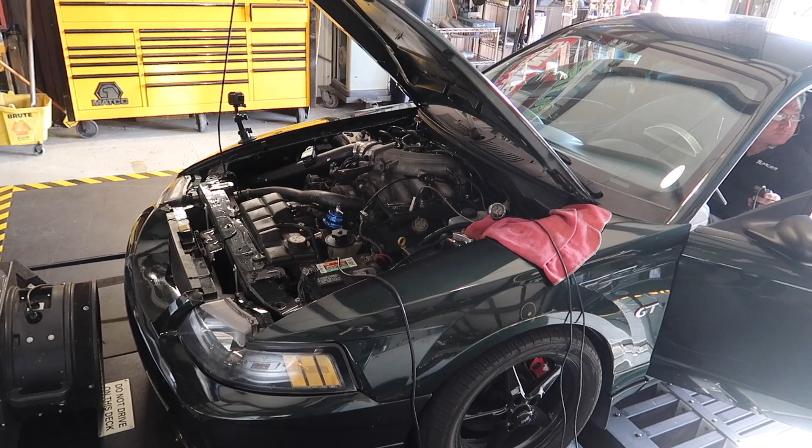Alright guys, so it is now the next day. This is saving the Bullitt. We left it out here, and we gotta figure out how bad it is. Zach brought me over here.

Our intention here, I took 2 bolts off the Terminator since we're gonna be taking those brake bolts off for the axles anyways, so hopefully we can bolt this brake on. I don't know the condition of it, so we're gonna pull the wheel off, get the car jacked up, and see where we're at, because the caliper coming off was definitely really bad, and it's definitely an eye-opener because I was just racing this car at the track.

So definitely gonna bolt check this car all the way through. For the most part, I have checked everything in the front suspension. We're definitely gonna check what's going on here in the rear. The old DeWalt should be able to break these bad boys loose.

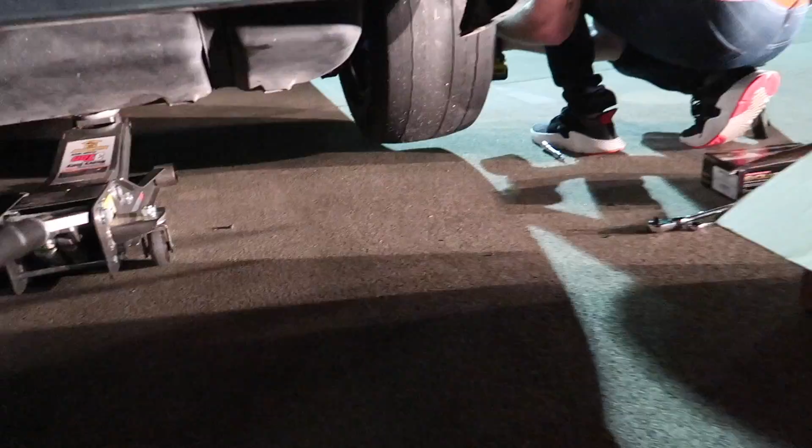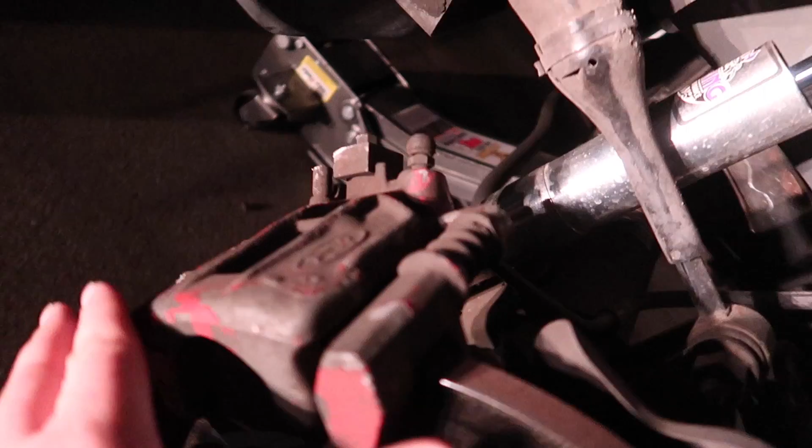So, what the hell happened here, man? Oh, shit.

It's not these bolts. That's the bolts that I brought. It's that.

Missing one back here. So we're missing the bolts on the back. So it turns out that the caliper bracket bolts are the ones missing. So we're gonna go yank the one off the Cobra and order a new one for the Cobra. Then we should be good.

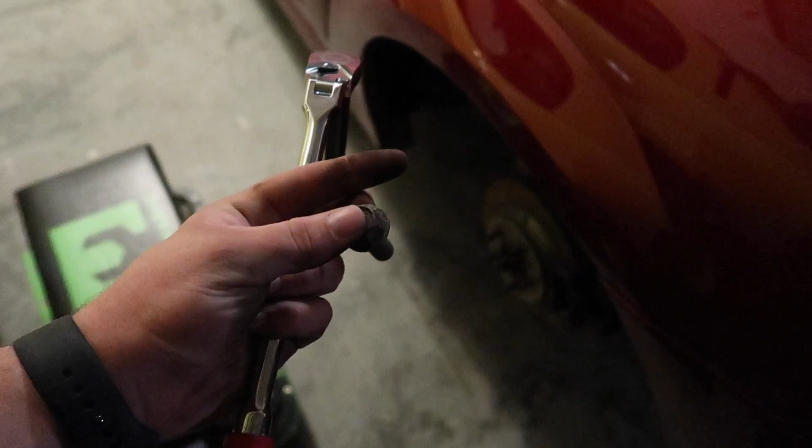We have now stripped the Cobra of more parts. Well, I can put the other 2 bolts back, but we're good. That's what we need. I don't work on cars, bro.

Alright, so we're just gonna put this back together and get it back. I have brand new rotors and pads for this car, so I had planned to put them on before we had catastrophic failure. Unfortunately, I didn't do it, and I would have saved this.

But we are tight. We should probably check the other side because I really don't trust the person who worked on this thing before. I have to reiterate, this is not John who worked on this car. It was whoever worked on it before. It was an unfinished project. I don't know if they just planned to tighten everything up later or whatnot, but there's been loose bolts all over this car. So it's just a project finding what is loose and trying not to die in the process.

Oh, were you filming? It was filming. Nice. Yeah, man, you really got the timeline. I'm on it. Let's roll back and put some brakes on. Cool, well, new brakes.

Alright, so we got the car back. We are going to install the new rotors and pads that we got from Rock Auto. They're just a Power Stop, basically a stock kit, but these will hopefully be much better than the broken mess we have going on here.

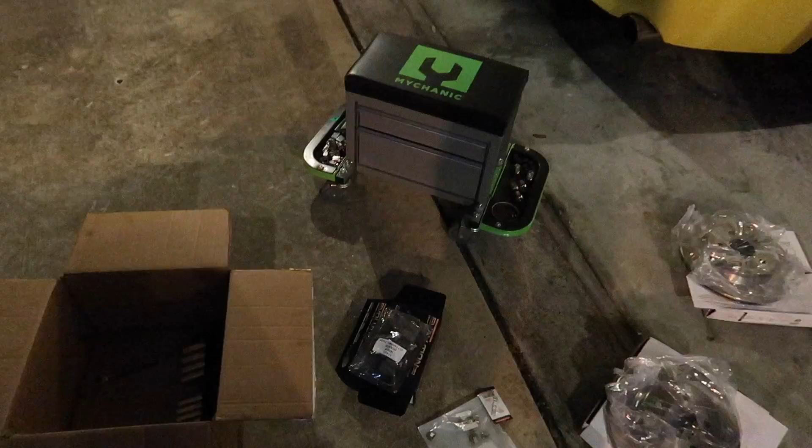This is not when you were supposed to change your brakes. This is way past the moment in which you need to change your brakes. Not good, not good. That's flat.

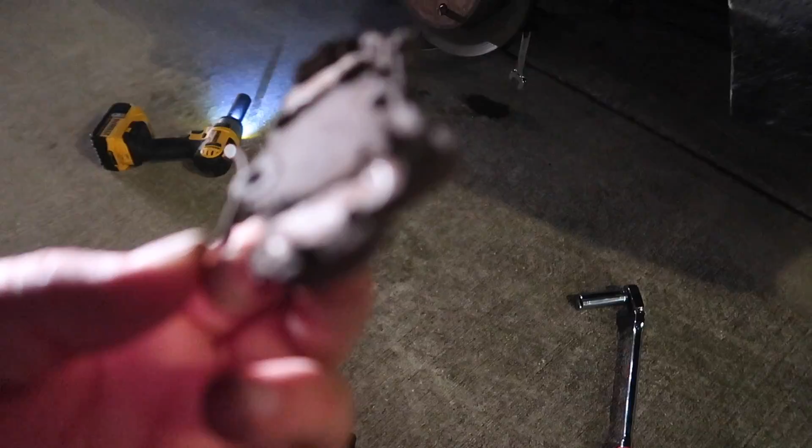Alright, I never closed this video out. I ended up getting new brake rotors from O'Reilly's. The ones from Rock Auto were wrong. Got frustrated, didn't want to film everything, but got it back together. We now have it locked and loaded on the trailer, and we're headed up to the dyno.

Alright, what is going on, guys? So we have the Bullitt on the trailer. We're gonna go head up to Jacksonville where Tony at Tuners Inc. is, and get the car on the dyno, brakes are all done, and we got a little surprise here.

This is the yellow spring, so 10 PSI should be able to get this thing going, get it ready for the track to go run some way faster times, and we're gonna be able to see exactly how much power it has right at the second that it ran on the 12.3 pass. So let's hop in the truck and head up to Jacksonville, about a 2-hour drive, and let's go make some power.

Alright, so we just made it up to Tuners Inc. in Jacksonville. We're gonna get the car unloaded and get it strapped down on the dyno.

Alright, so Tony is strapping down the car. We're gonna make one pull on the 7 PSI spring and see where it's at. Mile an hour was 109 miles an hour with all the weight out that we could take out of it. So it'll be interesting to see. We got this spring to go in for 10 PSI.

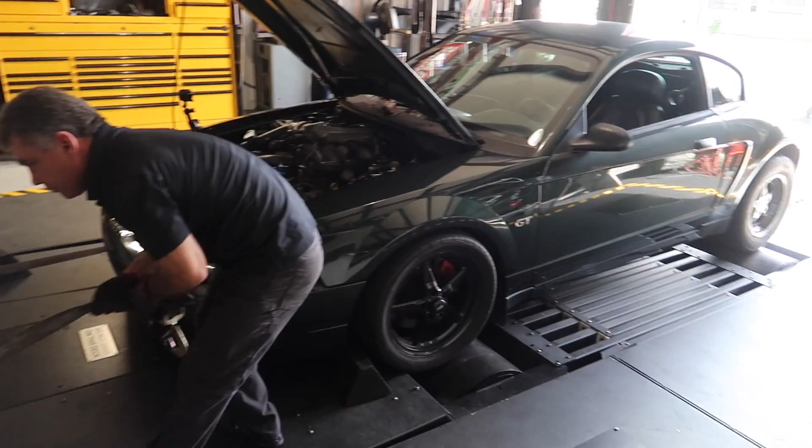We're gonna be making some pulls, making power. I'm actually hoping for the first pull to be like really low power, because that would be really funny to see where it's at. Hopefully we can get close to 400 today.

Tony has some awesome cars over here. Very, very fast twin turbo Coyote Fox. And then this over here is LS swapped and turbo. Insane. I heard you like turbos.

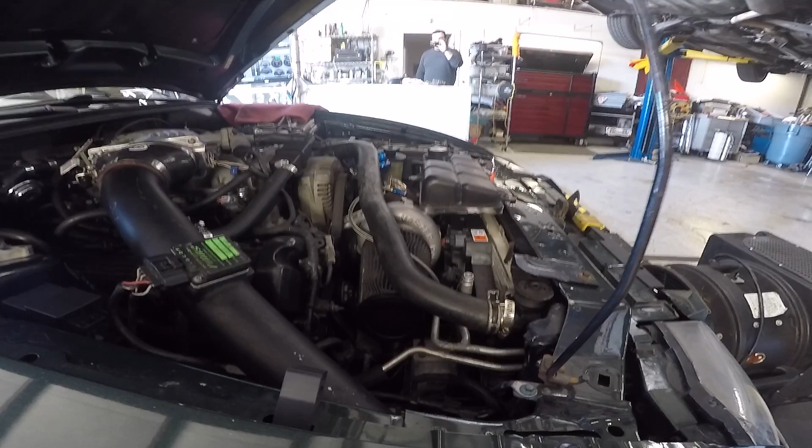290, yeah. Turbo took forever to spool. Wow. Is that right, or something happened in the end? Oh, okay, definitely on the fatter side. 12.3 on 290 wheel? That's awesome, you went through the traps at 109 mile an hour, roughly. Basically like 4,700, 4,800. That's what I was saying, it would seem like it was really low RPM.

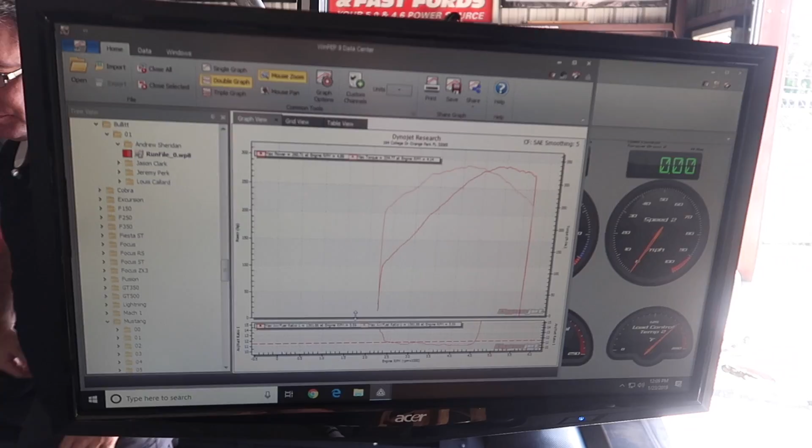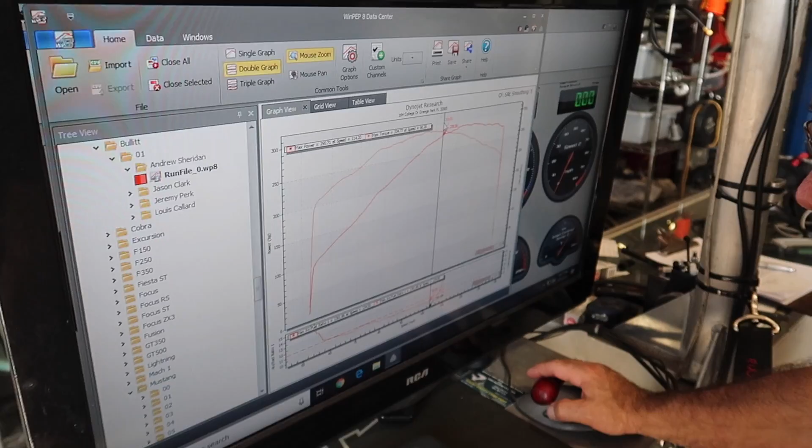But that's what we're going for, it's nice and safe. Yeah, it worked. So you can go fast at really low power. Granted, the weight out of the car helps too, a lot.

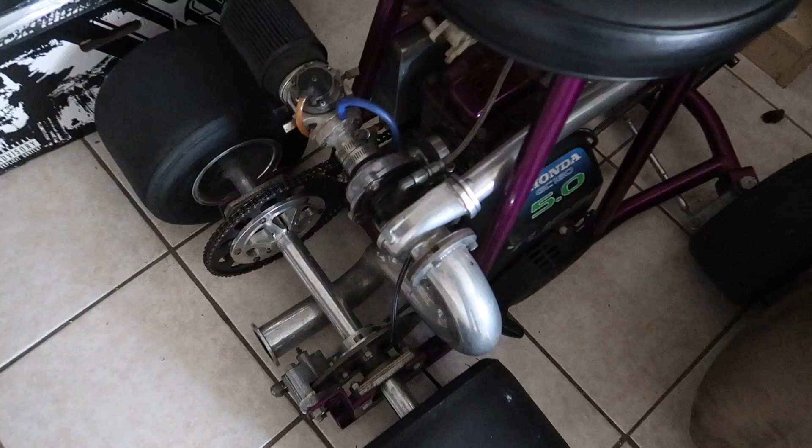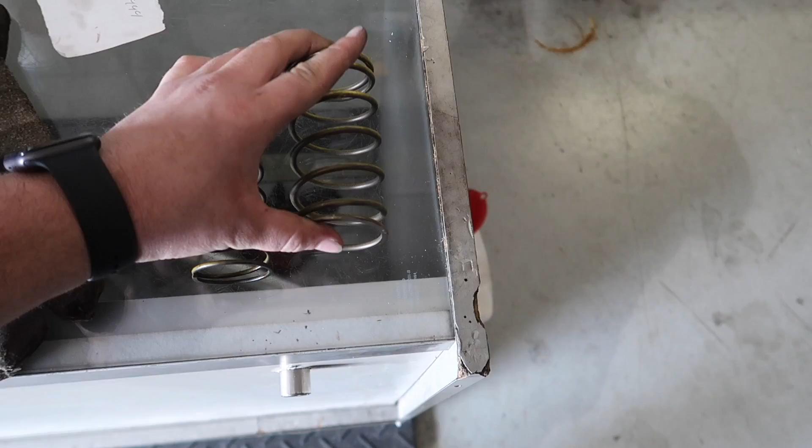So this is the spring that was in there, and this is what we're putting in there. This is supposed to be going from about 7 to 10. This is a huge difference in terms of spring. So all we're doing is swapping out the wastegate spring on the wastegate, turn up some boost. This is the old spring that we made about 5 PSI on. This is supposedly the 10, and it's very, very stiff, so I'm gonna see what it does.

So we didn't end up putting the large yellow one in, we found a different spring. Gonna try that for now. I think it should be good now, see how much boost it makes.

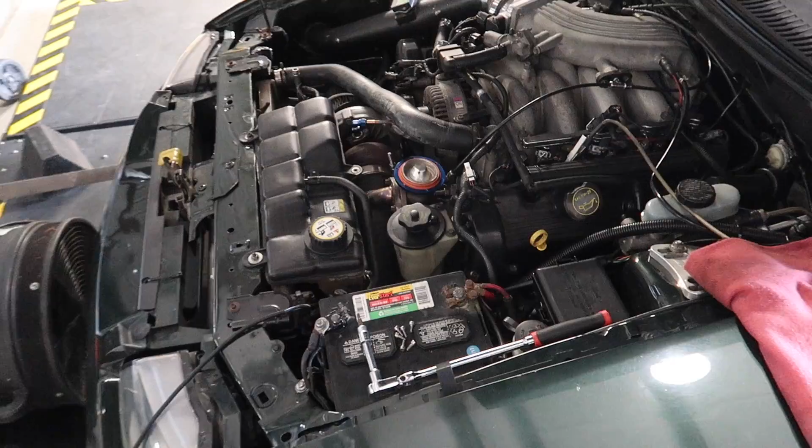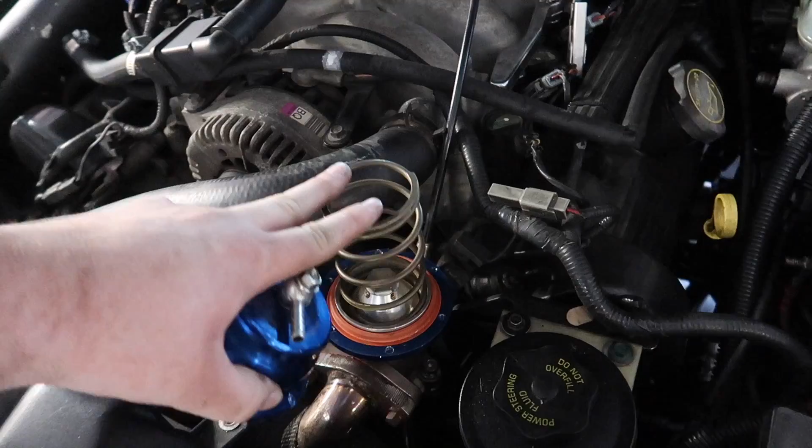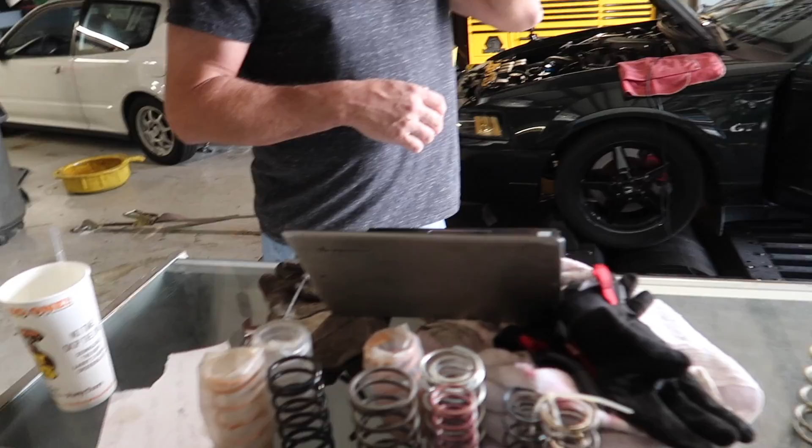Tony's gonna make some adjustments, but we're already making 430 torque. Oh man.

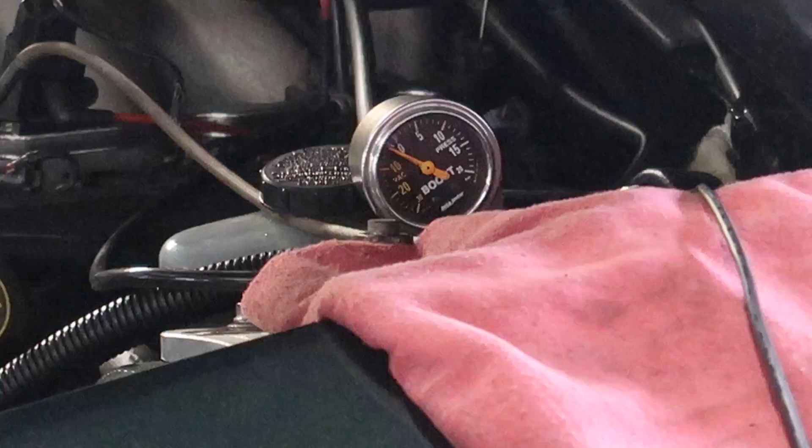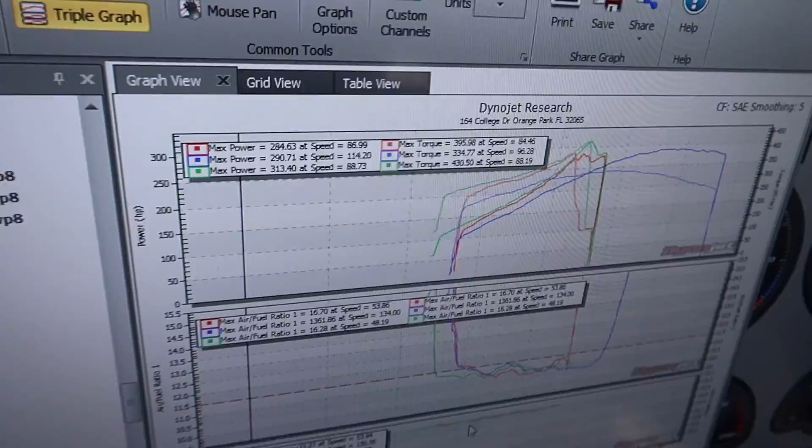Alright, so we're getting spark blowout, so we're gonna pull the plugs, take a look at them. So the gap was at what? 34? 34, so I definitely need a new spark plug gap gauge. It was working for the extremely low boost, but we're gonna go down to what, 26? Yeah, I'm gonna tighten it up to 26.

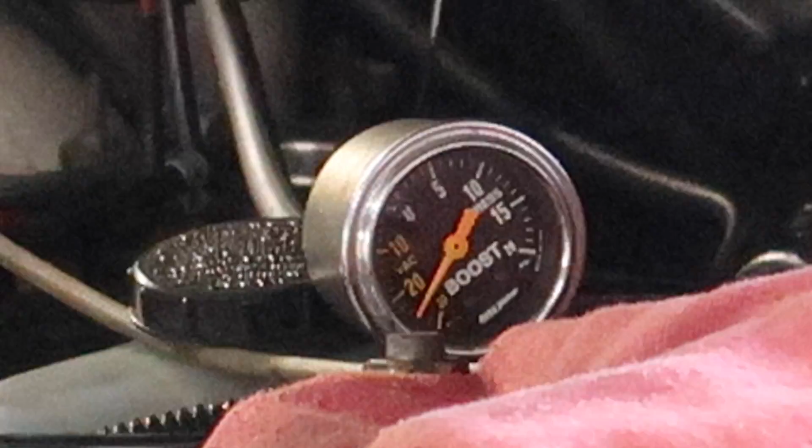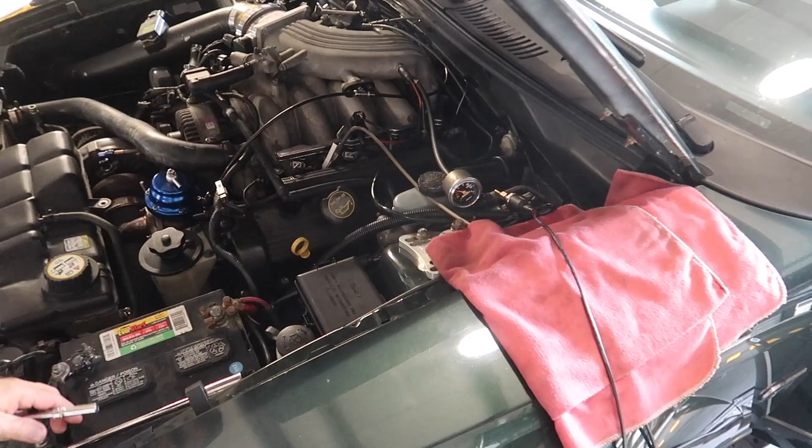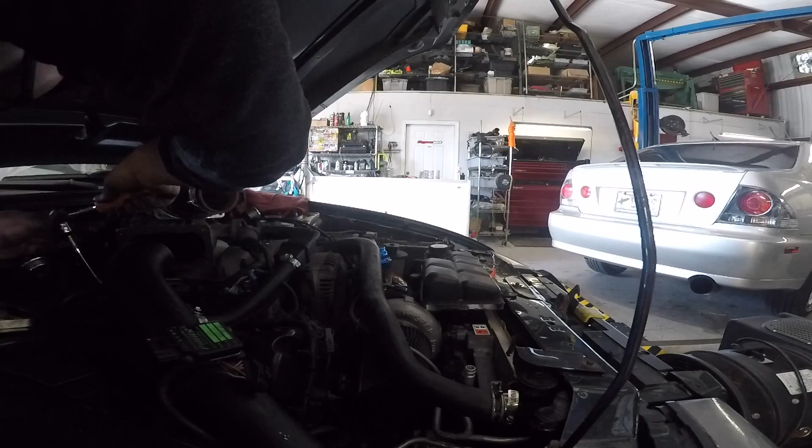The wide band, but it came up right when we were through. Oh man, 469 torque. Yeah, alright, second full pull. The last one was to 5,200, so we're gonna see what this does.

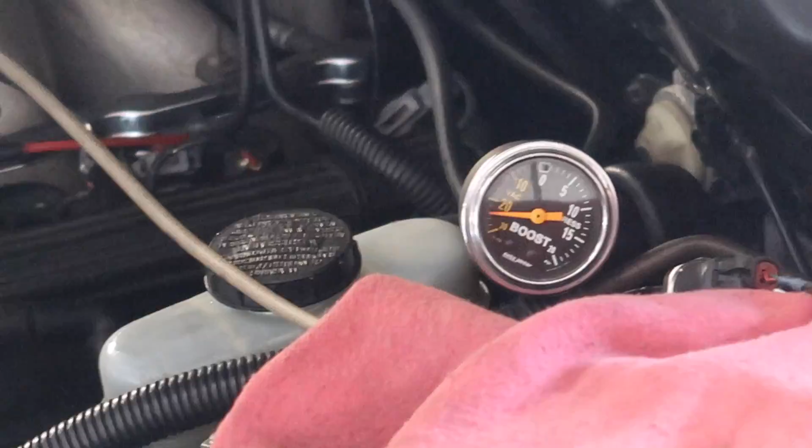What size turbo is it? I think it's a 70 millimeter. That's just a little, 67. Oh man, this thing is ripping, I can't believe it went 12.3 on 290 wheel horsepower, 330 torque.

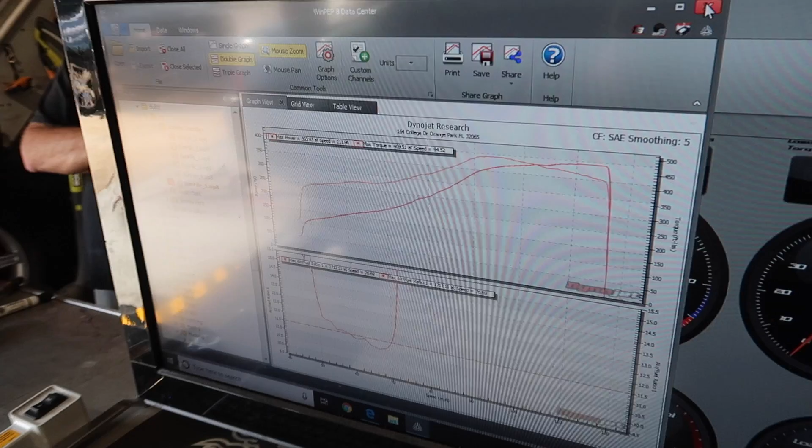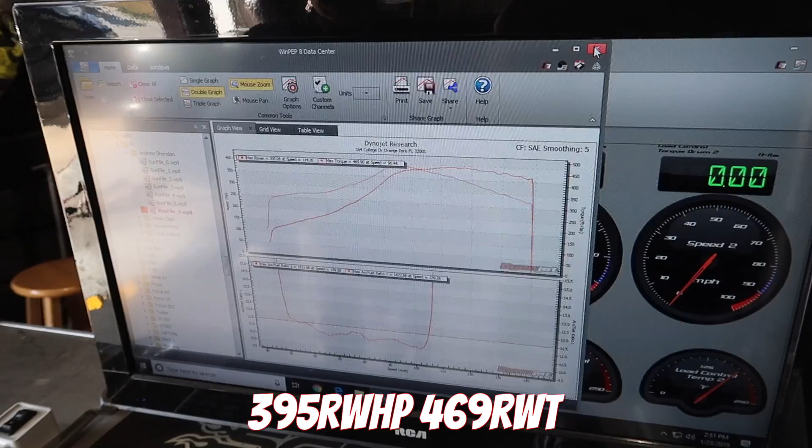Alright, before we go on the trailer, we got to stop by Mexico real quick. This thing is gonna be making a lot more power. Let's see.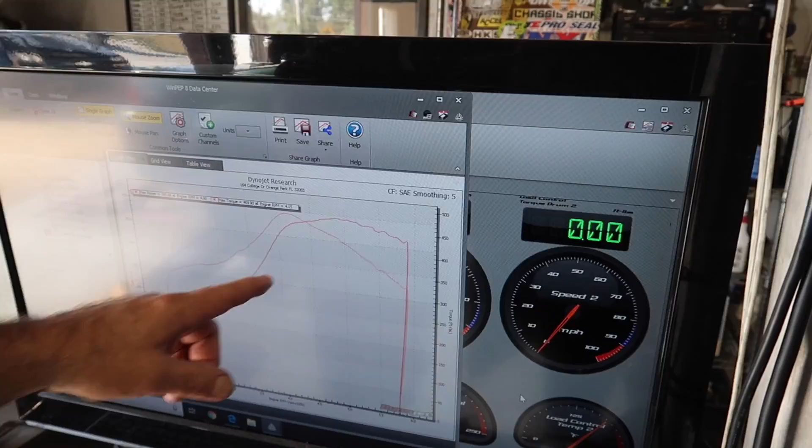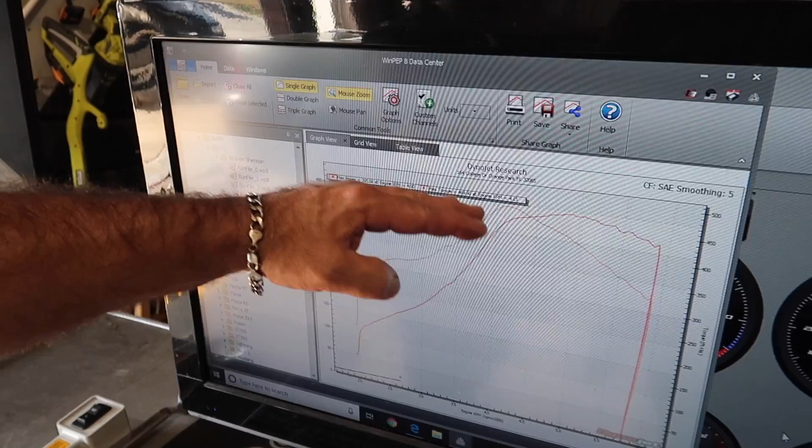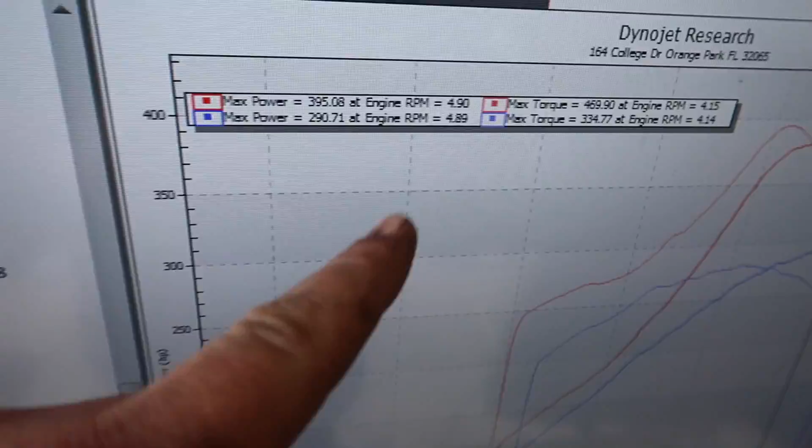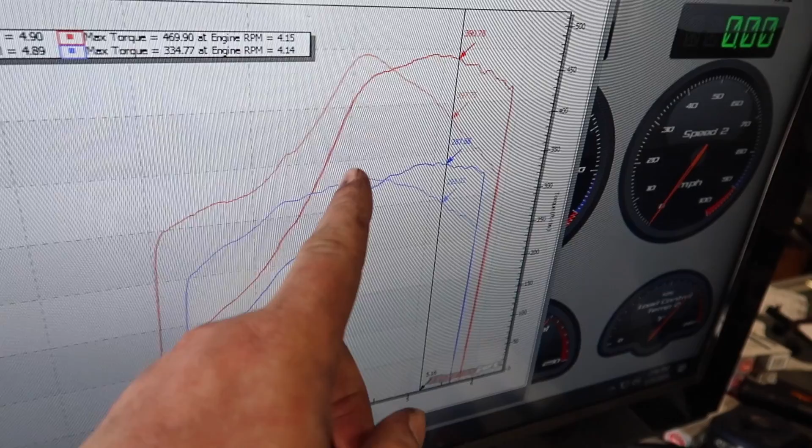Yeah, makes some more power. Oh man, that's sick. Oh man, this thing is fun. Woo! Oh shit, I just passed the place. Yeah, wow.

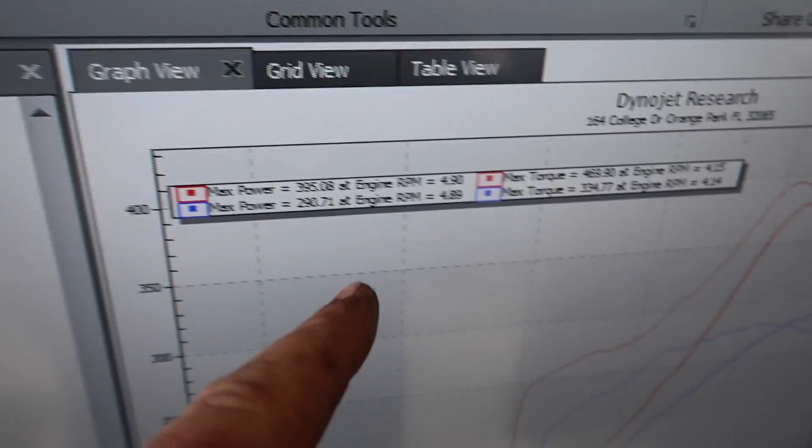We just went from 290 wheel horsepower to 395 and a boatload of torque. Wow. Yes. This is awesome, fantastic.

Alright, so we just finished up at Tuners Inc, got the car loaded on the trailer. I think we're gonna go home and then right to the track and lay down some 11s in this beast, if it doesn't break. I will have to swap on the bias ply tires, but this thing should be sick.

Alright, so my hair's a little bit crazy, but we're gonna head out of here. The car made huge differences in power. We picked up a lot of power, just going from whatever, about 5 PSI to 10, and this thing's gonna rip at the track. Huge shout out to Tony, he killed it on this thing, stuck through it, messing around with wastegate springs and spark plug gap and everything else.